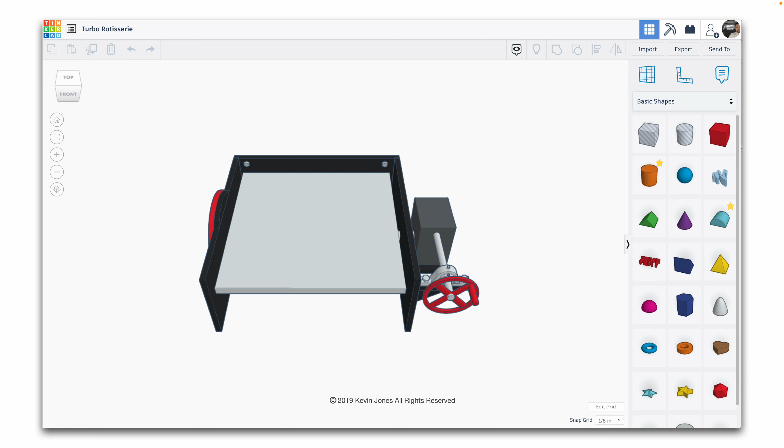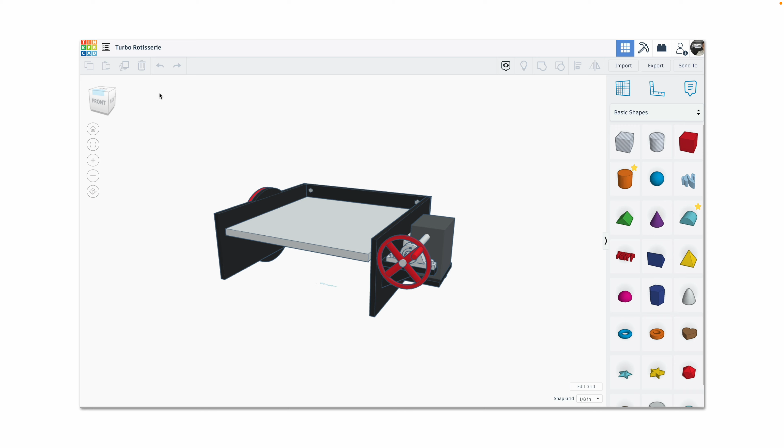So you have a view cube in the upper left-hand corner. You can rotate around your product that you designed, see it from top, bottom, sides, upside down, right side up. You can zoom in and zoom out on the product you're designing. You can change the colors.

So this is what the work plane looks like empty, and you can also snap the grid, or you can edit the grid size. You can have it in metric or standard.

So here's just a quick example of manipulating the shapes, so you can see how simple it is. It's very intuitive.

And if you want a hole in the center of something, you literally grab the hole, place it where you want it, and make it whatever diameter you want.

And you can rotate items in all three axes, X, Y, and Z.

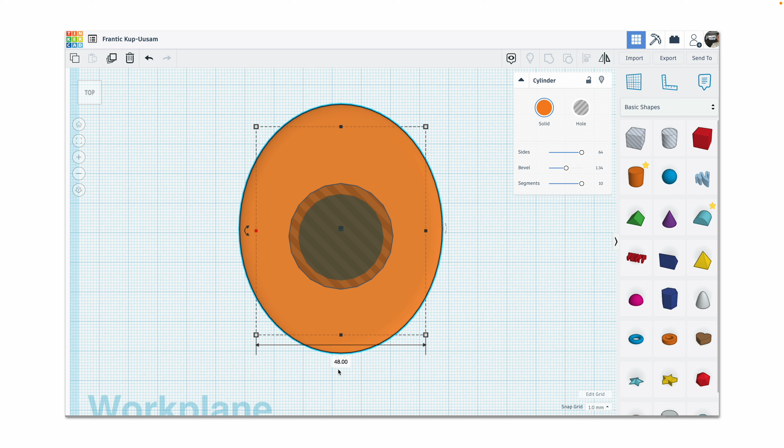And then you can pull it up and make it long enough to go all the way through if you want the hole to go all the way through.

And then over in the upper right hand corner, as you'll see here in a minute, you click on group and it groups those two geometric shapes together, and the hole shape disappears and you're left with the actual hole that you want.

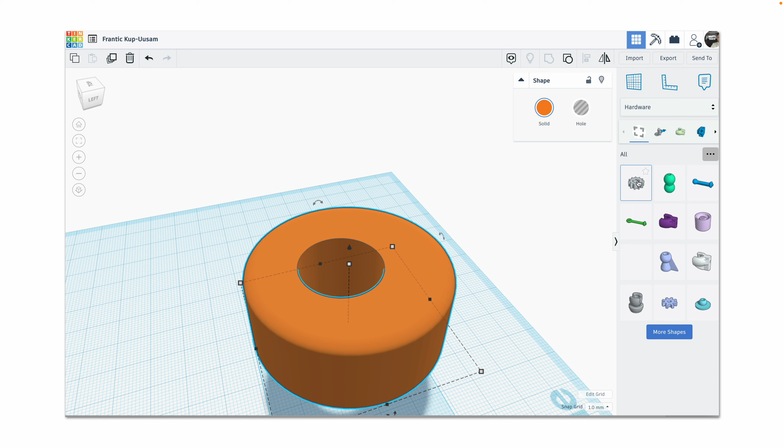Other than basic shapes, there's a list of other shapes you can choose from, and you can manipulate all these, move them around.

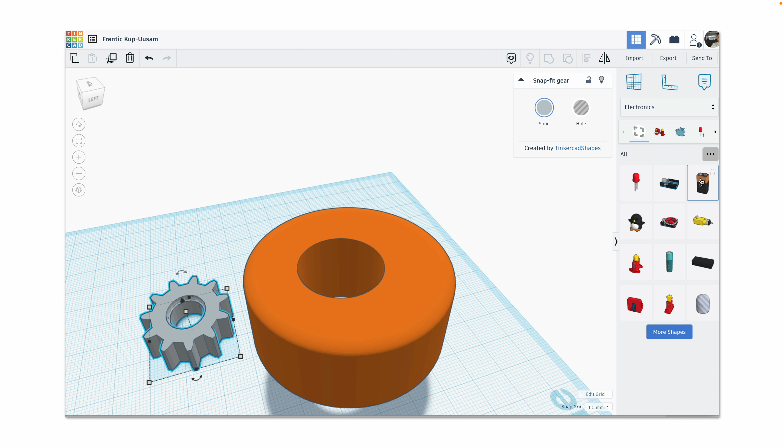There's also electrical components. So for example, here's a 9-volt battery. You can rotate items into space.

And then everyday objects.

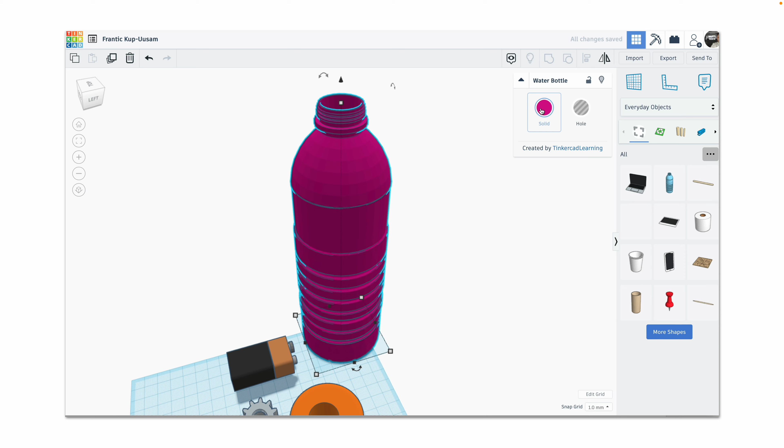So it's a fun program to use. It's very intuitive, very user-friendly, very simple. You can also export your 3D files out of here once you create your product or your design for 3D printing or whatever you want to do with it.